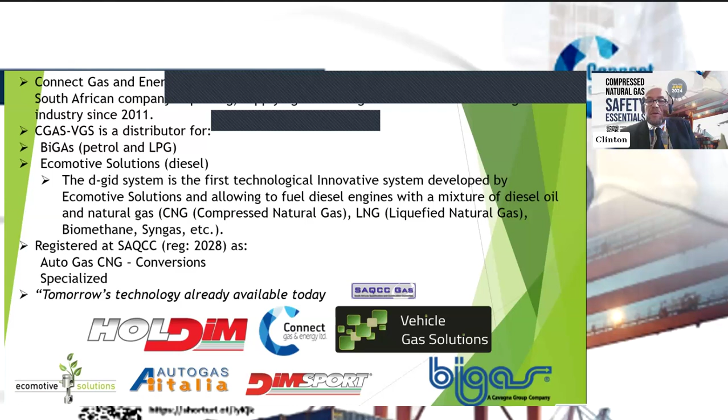We are very specialized, over this period since 2011, in perfecting the safety standards and also following the safety standards. It's a point to have a standard; if you don't follow it, you would then have a big problem as such. If we can move to the next slide, please.

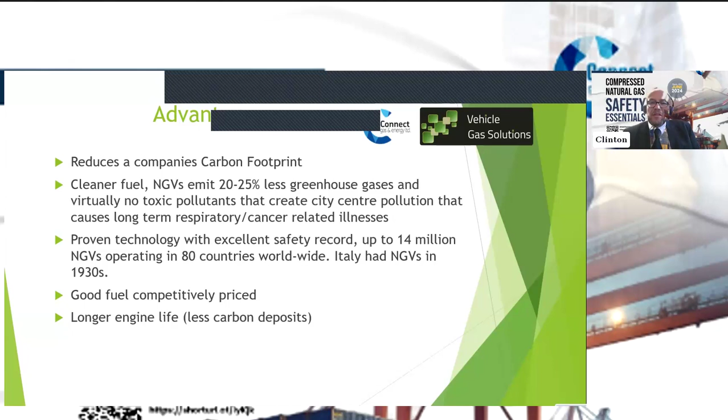The advantage of natural gas is to obviously reduce the carbon footprint quite a bit, as the previous speaker said. There's 20 to 25% less greenhouse gases emitted to the air. It's a proven technology - 80 countries around the world have been using natural gas since the 1930s. Italy in particular has done quite a lot of work in perfecting the safety standards in this type of application, especially when it comes to the compression of natural gas. The fuel pricing is good, as you heard the previous speaker say, and there's less carbon deposits actually burning into the engine. Let me move to the next slide, please.

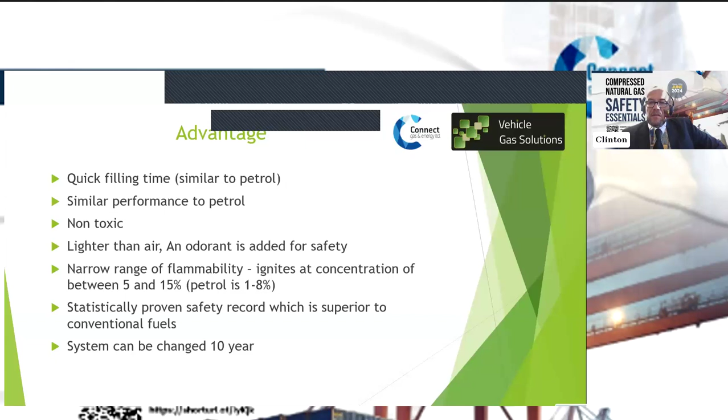Joshua, okay. So when you're filling the vehicle, it's a similar time that it will take to fill petrol - very, very similar. So it's not like it's taking any longer to fill the vehicle. The performance is very similar in the engines, so you shouldn't feel much of a difference when you drive on either fuel - fossil fuel as we know it, or natural gas. It's non-toxic, it's lighter than air, so it escapes very quickly. It's got a very narrow flammability range, as was said before. There's a very safe, proven record that has been set out, not just in African countries, but all over the world. And the system can be changed in 10 years' time, so the systems are very robust and can run quite a bit.

If you allow me, I will give you a short video of some testing of the cylinders, just to give you an idea of how strong these cylinders are.

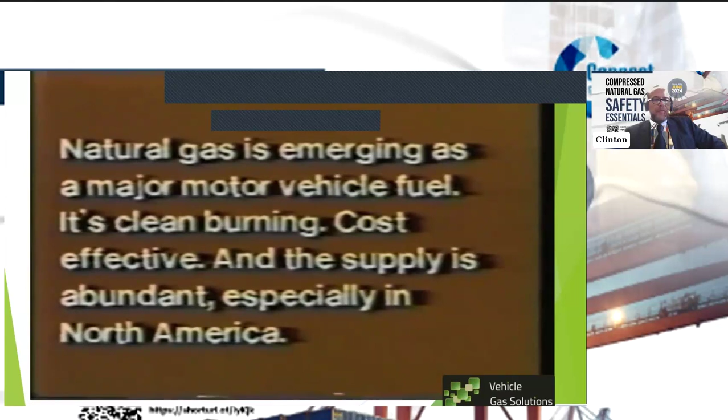Natural gas is emerging as a major motor vehicle fuel. It's clean burning, cost effective, and the supply is abundant, especially in North America. And there is a new aluminum composite reinforced cylinder that is lightweight.

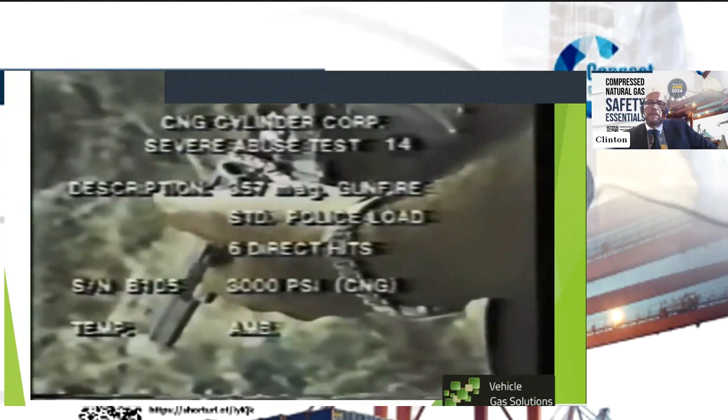Another criteria by which these new cylinders are judged is performance under gunfire. How do they hold up under gunfire, and when they're pierced, how do they behave? The answer to the first question is that they are very difficult to pierce, as these first tests demonstrate. The bullets here are standard police issue loads, and each projectile will have a penetration of approximately 50% of the composite thickness, or less than 1/8 of an inch. The distance from the firearm to the cylinder was approximately 25 feet. There was no severe damage to the cylinder, other than damage to the composite matrix. There was no penetration of the metal, and even after this test, the cylinder performed well within its design limits.

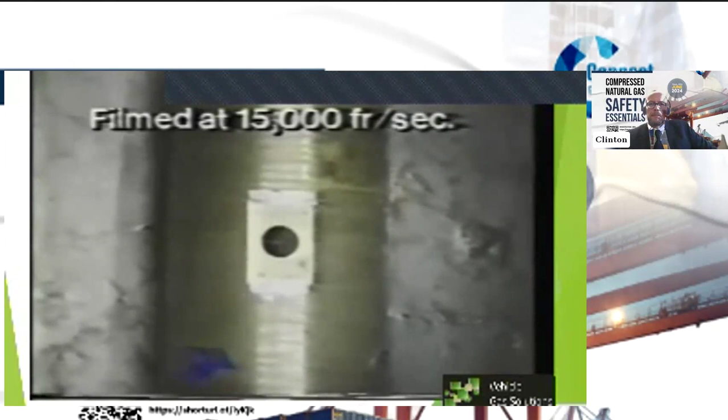The cylinder exceeded the minimum burst pressure of 7,500 psi. All cylinders were charged with natural gas. What is happening is the target and the bullet are basically exploding, but there is very, very little damage to the composite. A portion of the composite on the right-hand side of the screen can be seen to flip out and pull back in. However, the depth of the damage to the composite was again less than 1/8 of an inch. The total thickness of the composite and the cylinder wall is over 3/4 of an inch.

The weapon used here, the AR-15, is a standard military assault rifle used by both the U.S. and NATO countries. The test involves a direct hit with an armor-piercing projectile. The vent down was completely safe. There was no ignition of the natural gas, and it vented down in less than a minute.

You may safely conclude from a review of these tests that even under the most severe conditions of high-speed collision, bonfire, dynamite, and gunfire, these new CNG cylinders performed safely and predictably.

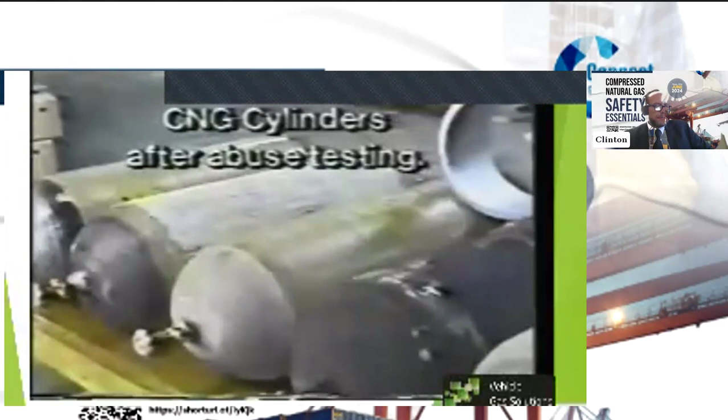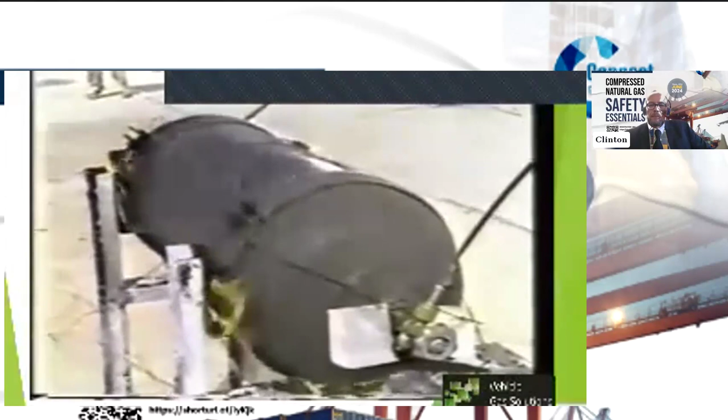The service pressure of the cylinders, 3,000 psi, was maintained under extreme abuse. There was no venting of the gas in most cases. The exceptions were the direct penetration gunfire tests, which were of course designed to penetrate the cylinders, while the bonfire tests were designed to specifically check safety valve performance.

In all these tests, there is no fragmentation of the cylinders because the composite matrix completely encapsulates the metal shell of the cylinder itself. To the best of our knowledge, there has never been any cylinder ever built which has been subjected to the kinds of tests you've just seen. And once again, the basic reasons for these tests were to establish the total integrity and strength of these CNG fuel cylinders under the worst conditions, as well as the overall safety of natural gas as a vehicular fuel.

So you would agree that the guy was very brave, actually shooting the cylinders. I definitely wouldn't have tried that, but he was confident because of the way the cylinders were manufactured and the standards used. We shouldn't try this at home since it's already been tested, but safety is always first—please make sure you're following proper safety standards at all stages to avoid accidents.

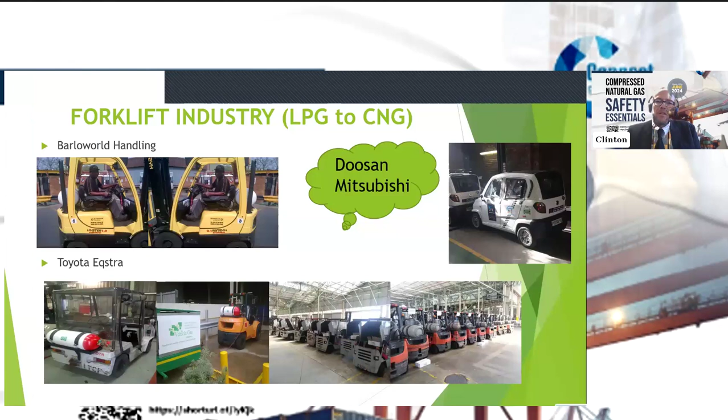So it's very important, not just with the cylinders, that we concentrate on the manufacturing of the bracket and how it's installed onto the vehicles, especially as an aftermarket product onto current vehicles in your market space.

Here's some other projects we've done—forklifts converted from LPG to natural gas. The Toyota plant in South Africa was completely converted from an LPG environment to a natural gas environment.

On the left you'll see the test units used to run a feasibility study on whether it made sense to change over all the vehicles running on the plant. Here are some more examples of vehicles we've done, not just for the taxi industry but also for security vehicles.

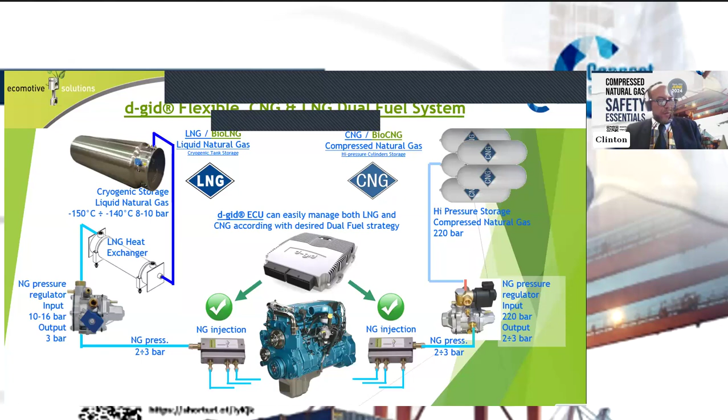Through its ECU, we're then able to cut back the diesel and allow gas to be injected to take up the energy we've removed out of the diesel. Just to go back to the dyno test—just one slide back, please, Josh.

It's very important for us to keep the power exactly the same on diesel engines, as we wouldn't want the gearboxes in the trucks and buses to play around looking for gears while it's looking for power when pushing out.

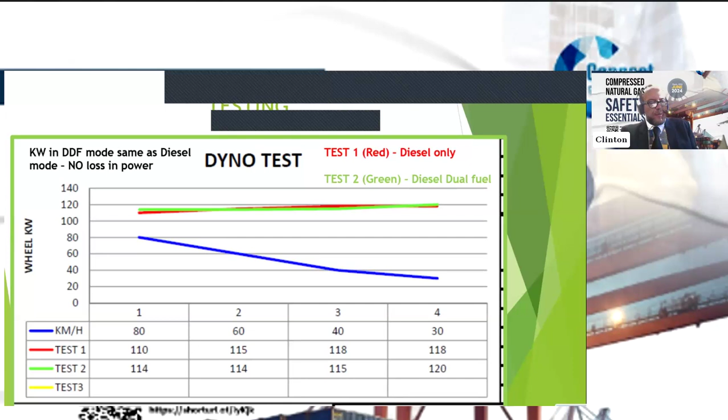So sorry for the slides, it's gotten a bit mixed up, but moving on to some more diesel projects we've done. Josh.

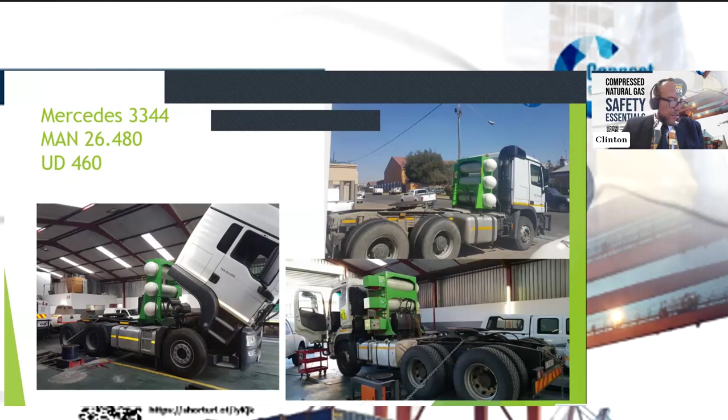Next slide. Some mix of trucks, we're able to convert anything from a Mercedes to a MAN to a UD to a DAF to a Volvo, new Volvos that we've converted. Also this type of Volvo, just go back one please.

You'll see all trucks go onto a dyno to make sure the vehicles are doing their correct power, as with the previous slide, where we keep the power the same. Next slide please.

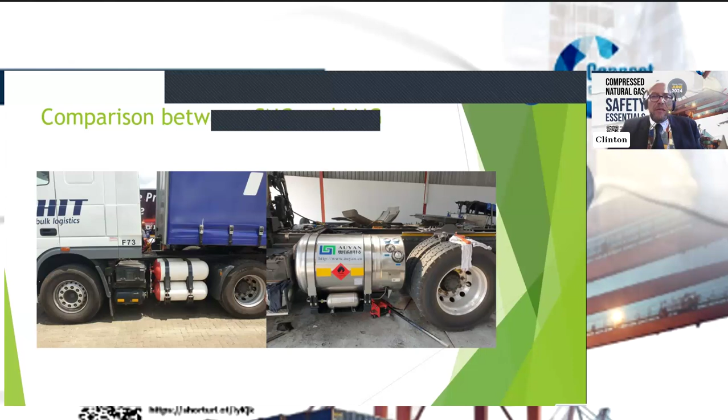We're also into tractor conversions with our partner Ecomotive Solutions, which has been testing tractors in dual fuel mode, which is very nice. In South Africa we have a lot of farming tractors running, and we're venturing into that market space currently with our farmers.

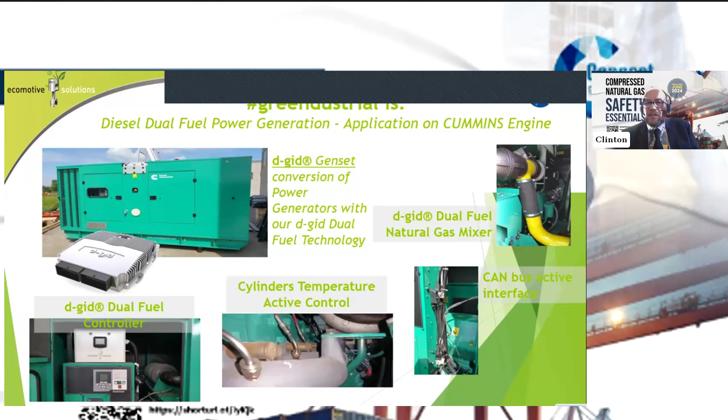We're not just limited to that, we also do generators. Next slide please, Josh. Generators in dual fuel, the nice part is that if the gas stops running, it's running on diesel. Unfortunately we can't run out of diesel and expect it to run on gas, we still need the diesel to ignite the gas, but it's a good way of not changing your whole generator to run a gas dedicated generator. So it's quick, it's easy, it's non-invasive, and the saving is there.

60 to 70% substitution. In mining we also ventured in, we did a CAT 777 water tanker, removed the engine, and did a proper test on the dyno. On the next slide you'll see how the testing happened, and we'll discuss this video afterwards.

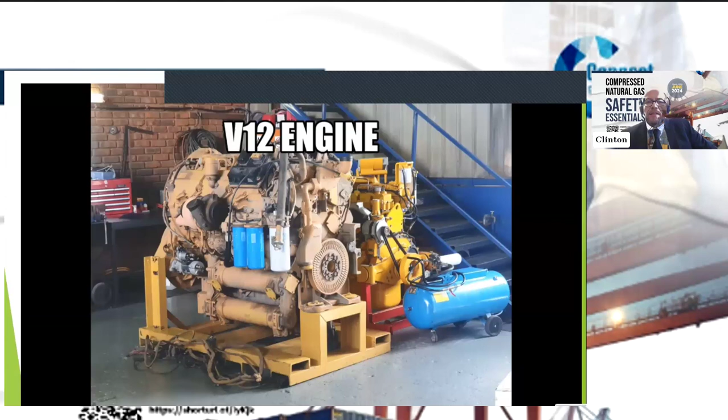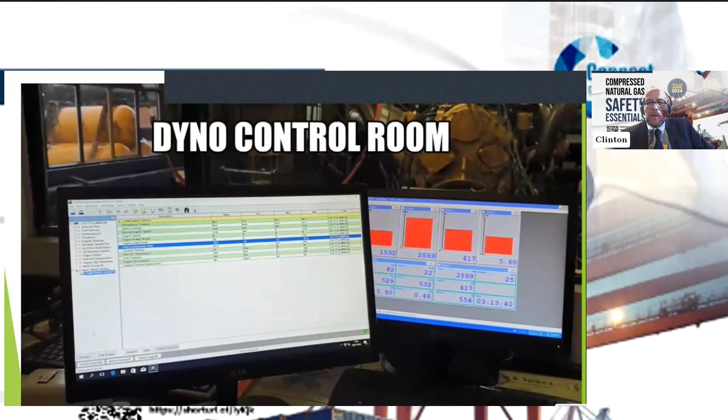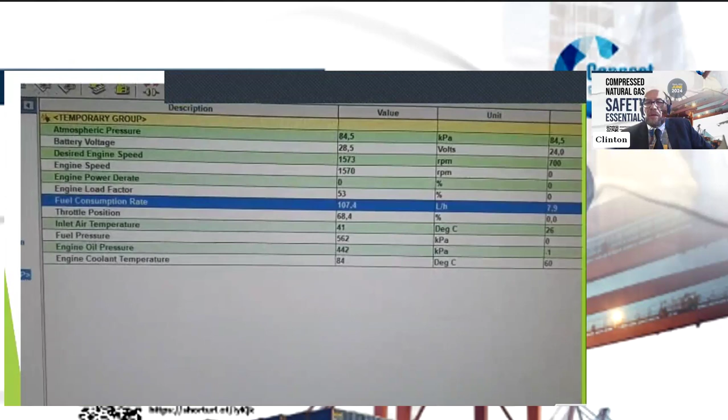In this case, the V12 diesel engine running on a dyno. This is the control room, monitoring the engine and its fuel consumption. Please take note of the blue line where the vehicle is running at 107 liters per hour.

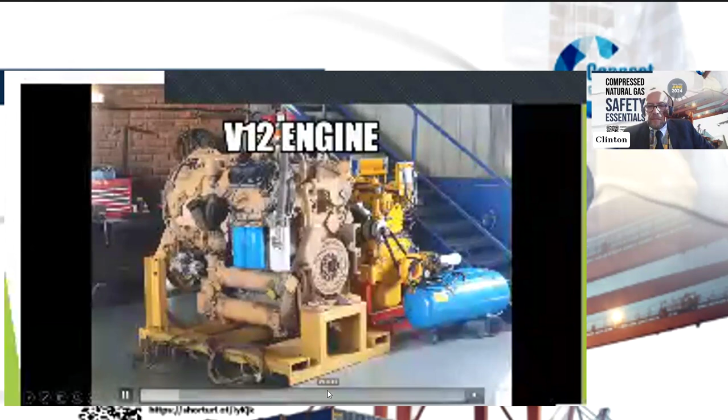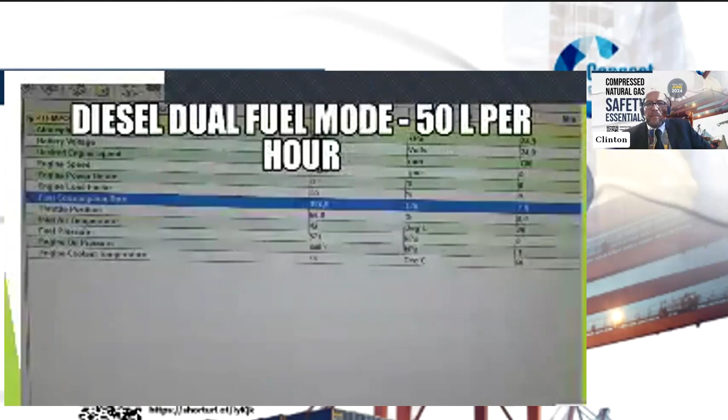When we flick the switch to go to diesel dual fuel, you'll see that the diesel the engine demands has been cut and it's reducing... sorry for the bad quality. Oh, something went wrong there, not sure if it was mine. It reduced to 50 liters per hour of diesel while it was injecting gas into the engine.

So I hope I didn't go over my time too much, and thank you for your time, I do appreciate it.

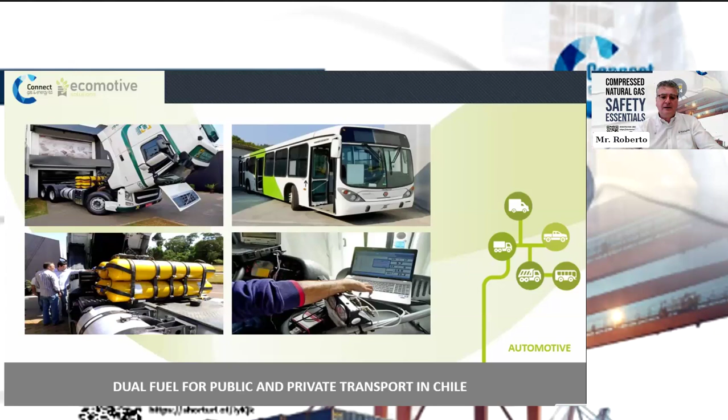But on a car, for example, where the cylinders are usually in the baggage compartment, it is mandatory to have an approach with ventilation. A way to put the place where the cylinders are living in contact with the outside, so that if a small leakage is there, naturally the gas can go out without creating a hazardous amount.

Then another important point concerns the components, because together with the cylinders and piping, there are a lot of components included in a conversion kit—pneumatic components like regulators, valves, and so on. All these components must follow a regulation.

I always speak about European regulation because with just one regulation, R110, technically all the components included in a natural gas kit are ruled with information that guarantees the safety of the system.

For example, if we are speaking about the cylinder valves, you need to be sure the valves are used, for example, as a PRD—a relief device able to open in case of overpressure. Then for a pressure regulator, you need to reduce the high pressure in the cylinders to an engine pressure that the engine can digest through a series of injectors. There you also need a solution that is leak-proof and extremely tight in regulation capability.

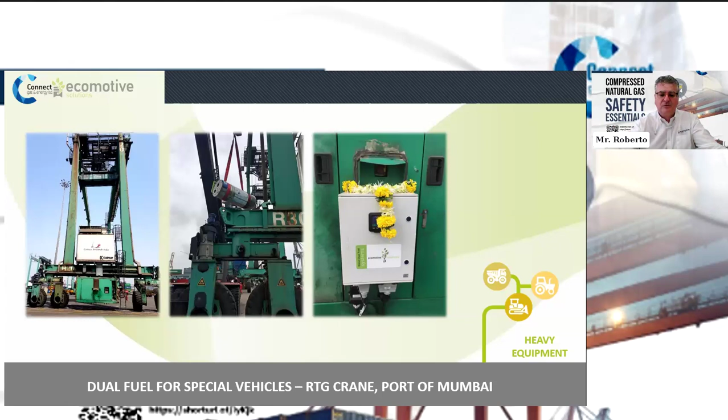Then, of course, all of that will be connected to regulatory compliance, and this is something that I understand is going on in your country. So we are completely available to support in case some advice is required, some information that we can provide through Mr. Merigo from this important association in Italy, connected to what was done to make the use of natural gas safe in our country and in other parts of the world. So I believe this is more or less what we can offer.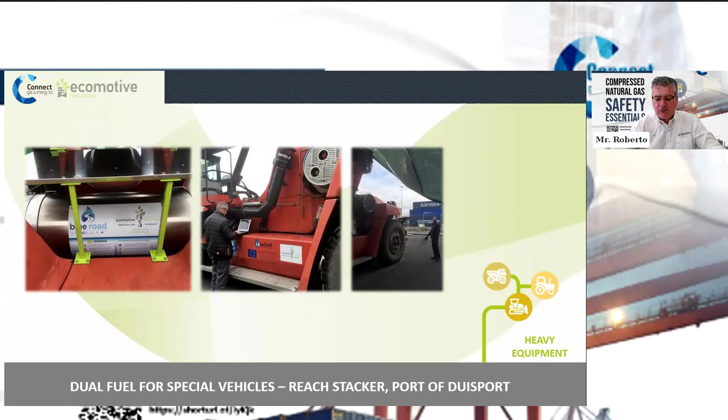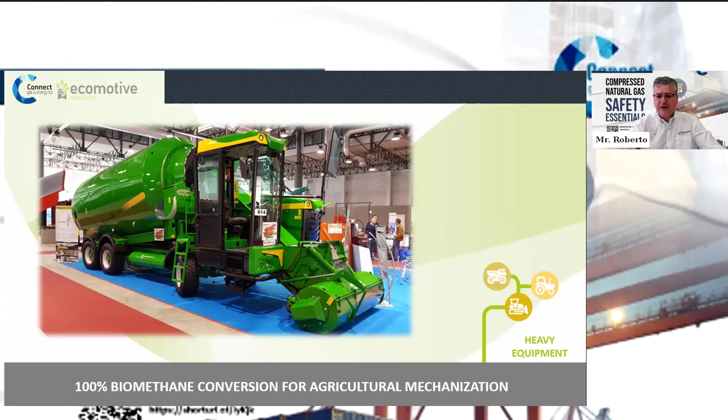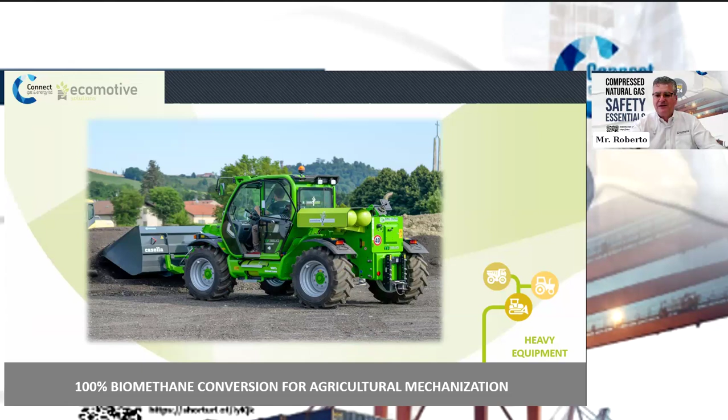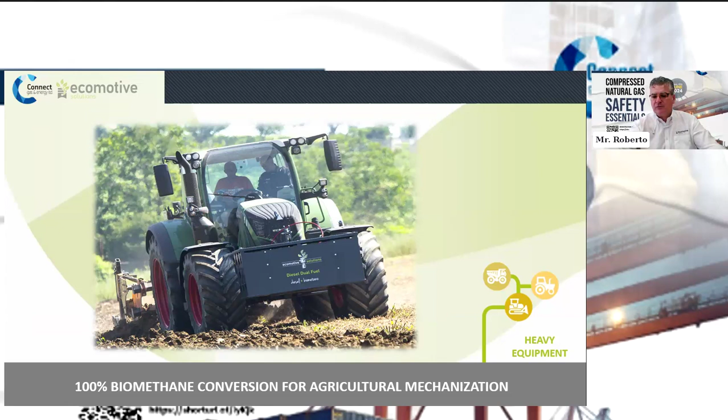Last but not least, environmental protection also includes making sure that a vehicle using a natural gas system is properly tuned in order to have good results in emission performance. Because there are many ways to feed natural gas into a vehicle - a way where you have practically no control on emission, or a way where you can have a balance between the control on emission and the complexity of the system.

Because we are working in a very large number of fields. You see here, this is a train that runs on natural gas, but the regulations there are so strict that we have to invent a way to keep the emissions under control in any condition, because they are running through cities and so on. But this is a story that makes sense for really high heavy equipment where also the investment is really high.

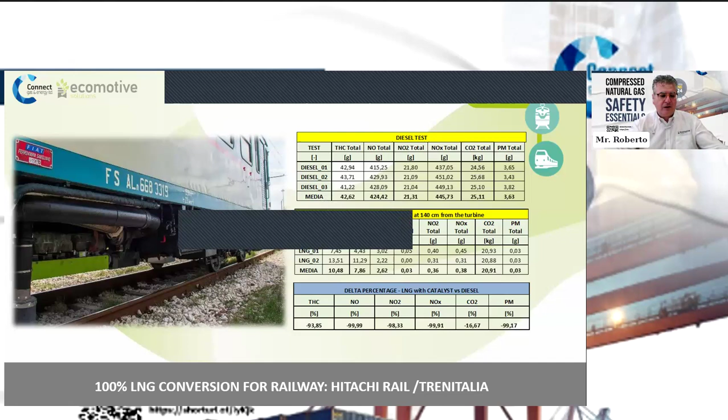But you will be facing both professional users and private users. And the private users are looking for solutions that they can pay for and manage easily. And that is the reason why a balance in the regulation that lets a system be potentially cheap but safe is one of the biggest challenges of a successful project in a country that started operations with natural gas.

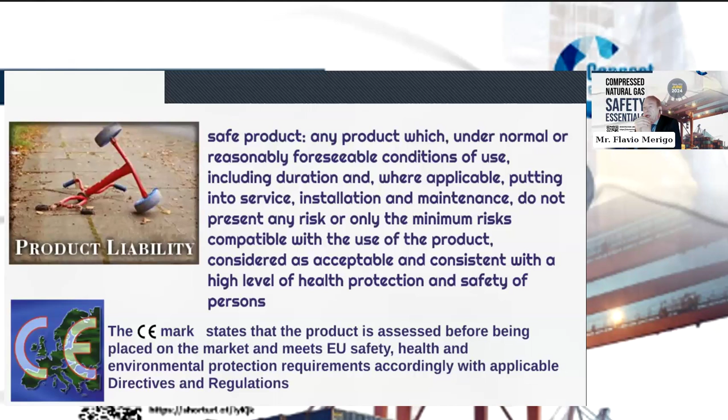So now we come directly into the framework of the standardization regulation. I have put here the sketch of how ISO TC22 subcommittee 41 works.

Sorry to bother you, but I'm forced now to give you some reference to the technical committee, and a number of references to standards — that's exactly where we are moving. This is the world in which we are operating, and I have no other choice but to cite standard numbers and the bodies that released these standards. ISO, as you know, is an international standards organization.

TC means technical committee, and that's the number of the technical committee. SC means subcommittee. This is the technical committee that will have a chair until the end of 2023, and as you can see, there are many working groups active inside technical committee 22.

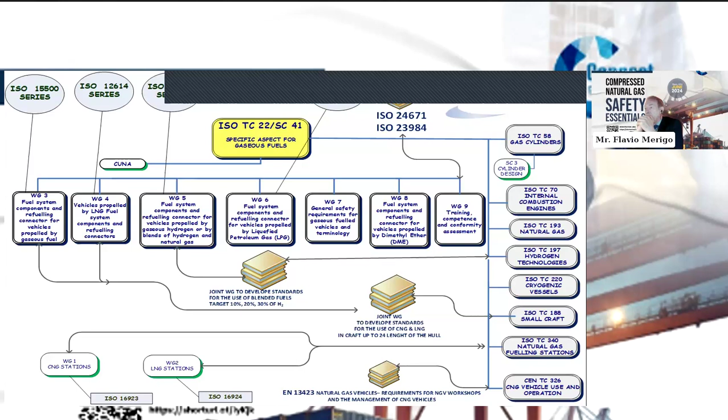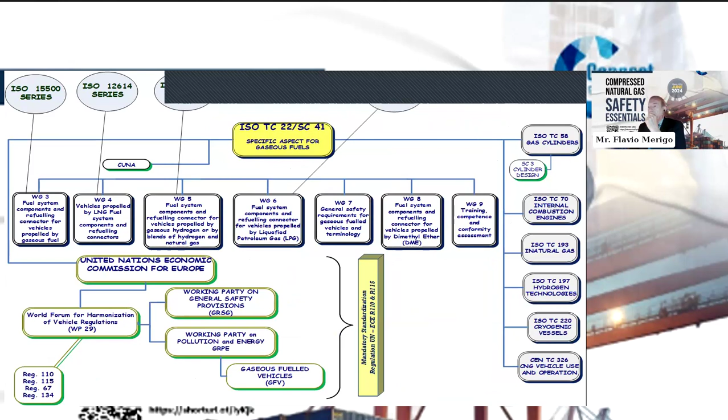Okay, so briefly now I'll show you which is my activity inside these reference standards for the CNG world.

As I mentioned, in subcommittee 41, I am the project leader in working group 9. If you remember, group 9 deals with training and competence. I have already drafted, and these are already published, two standards. One deals with training of NGV personnel, which I will detail later, and the second is the certification of competence.

This standard has been done and published recently, and it is a very new and effective standard, just because for this standard I have collaborated with a CASCO committee. CASCO is the Conformity Assessment Committee of ISO, and this standard is a certification scheme for all the technicians involved in the use of natural gas vehicles.

As has already been said, but let me say once more, from the point of view of safety of CNG and LNG, we can say that thanks to the fact that we have all these standards, which are revised yearly and have been applied for the last 30 years, the system is now very, very safe. The challenge is to maintain safety inside the system by means of very competent people applying the standards. Next one, please.

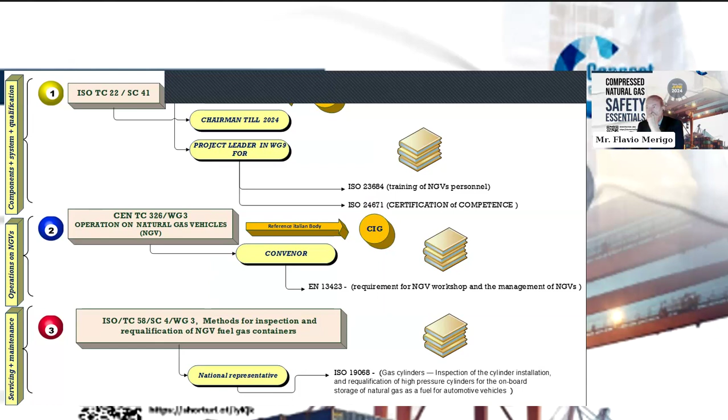Just to give you a further idea of what I've already said, I'm the convener of working group 1, natural gas fueling station vehicles. We have provided a very deep revision of ISO 16923. We have covered many items and developed many other items that were already inside, but not so much developed.

Just these days, I'm sending to the working group members the last revision of the standard. Just to give you an idea, it's a standard that now consists of 45 pages of requirements. We are also working with the alternative fuel maritime sector, trying to draft standards for application of CNG and LNG in this kind of vehicle, because vehicle means also boats and ships in the ISO definition.

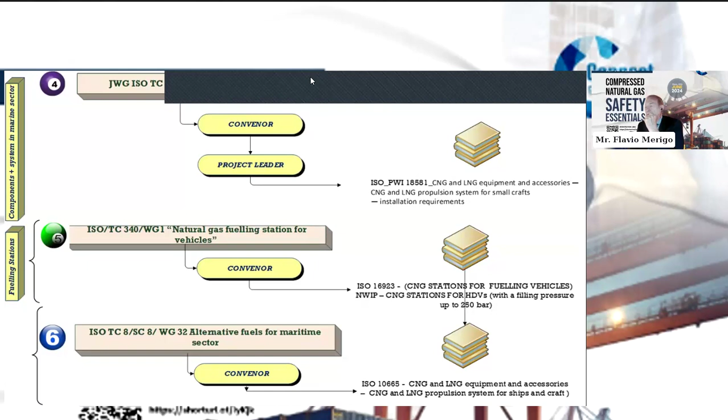In this case, there is one standard already done, ISO 10665, that will be published very soon. This means that we will already have a standard covering the use of CNG and LNG in the maritime sector.

I'm about to finish. Now I would like to once again talk about the system and the chain that joins all the parts of the system. As usual, we can measure the power of the chain once we have defined which is the weakest link of the chain, and which is the critical component. Let's try to understand the answer to this question.

That's the problem: the personnel training.

As already mentioned by Roberto, we have seen in many countries that when a new market on CNG starts, there are many operators looking for very cheap components and very cheap kits. The more the market develops, the more there are people with an absolute lack of competence looking for very cheap components. It's very dangerous, because it's a sort of brake on the development of the market, just because once people perceive that the system is not safe, they are no longer interested in using CNG vehicles.

This is the scheme that has been taken as the base for the development of the two standards, 23684 and 24671. The first one deals with the training and qualification of people, and the second deals with qualification and certification, because, as you can see, we have different levels of competence required.

And in doing that, we have applied once more a directive given by the European Community in order to let the competence of the people be recognized worldwide, mainly in the European states.

For this reason, we have defined which kind of competence is required for the technicians dealing with NGVs. As you can see, we have defined two figures inside the fueling station: the technical manager and the operator. The operator can be trained by the technical manager, but the technical manager shall be qualified after a training course recognized by a certification body.

Once he has received this qualification, he can train the operator at the fueling station, but of course takes responsibility for everything that happens inside the fueling station.

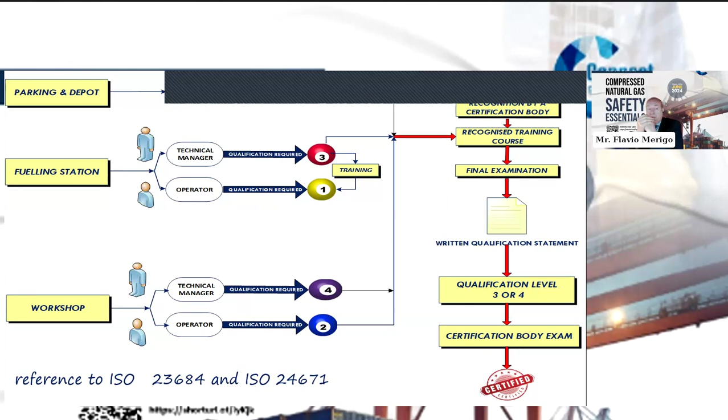I hope I've been able to give you a clear idea about the qualification and regulation framework in which we are moving in Europe. And thanks again for giving me this opportunity.